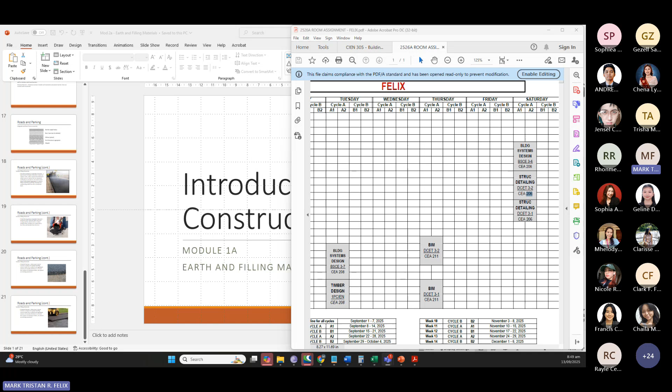Okay, let's start. I will begin with a brief intro, let me show the syllabus first.

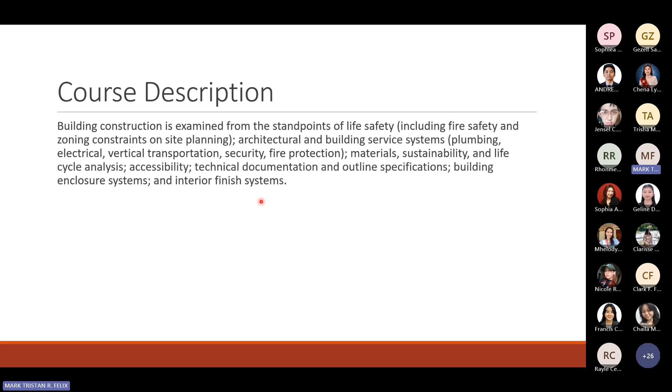That's right. It is examined from the standpoint of life safety, including fire safety and zoning constraints on site planning, architectural and building services systems such as plumbing, electrical, vertical transportation, security, and fire protection. Also materials, sustainability, and life cycle analysis, accessibility, technical documentation, and outline specification, building enclosure system, and interior finish system. This lecture will also focus on developing building systems, including architectural designs, building materials, and construction techniques, and will foster the skills required to adopt a building system approach compliant to the National Building Code and its referral codes — the other codes necessary for us to check, visit, or abide by whenever we have a project.

The students will develop an understanding of building systems, including different types and applications of building materials, diverse construction techniques, sustainability principles, and their impact on the property life cycle. This knowledge will integrate with industry-based case studies. The course will also include at least one site visit to an opening building in the locality.

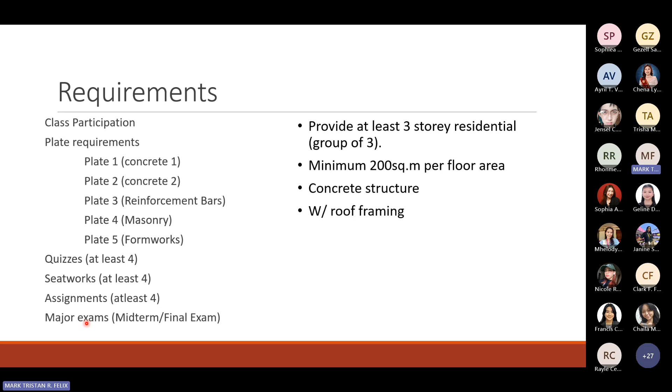Pero again, just do your part. Hindi naman kayo magkakaproblema, just provide this entire requirements. And then, of course, for the quizzes and exams, dapat passing yung mga nakukuha na grade. I will be strict with the 75% passing, so lower than that, kahit point something ang kulang, I don't round up the value ng final grade ng estudyante.

Kaya ngayon pa lang, along the way, if you will be encountering issues, kung magkakaproblema kayo, like meron kayong hindi masasubmit on time, or meron kayong issue, please let me know, lalo na kung meron akong mga deadline. And then we'll see if I will allow extensions or late submissions. Kasi medyo mahigpit din ako sa late submissions. Yun lang naman in terms of my initial request para everybody happy pagdating ng end of the semester.

Okay, so for the classroom policies, regular class is expected. It may not be particular on the online class, pero yung face-to-face class pag nagpapa-exam na tayo, expected ko papasok kayo.

Now, for any late submission, I will not accept. Let me give you an example. Nagpapasa ako ng assignment sa kabilang section, last time is Tuesday, na-extend kasi hindi ko na-upload, hindi ko naloload yung system sa Teams. Ngayon, i-email ko kahapon until 11:59. Unfortunately, meron pa ring nag-email ng 12:00, pasado na. So hindi ko lang alam anong ginawa ng estudyanteng yun. I won't accept those late submissions.

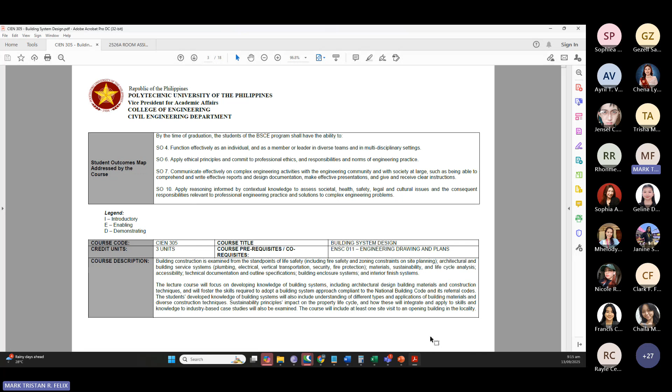So let me discuss first, as part of the introduction of the subject, the terminologies that you will be encountering along the way. If we look at the syllabus, after the building code we have concrete, steel, pre-stress, masonry, and earthworks, which isn't here yet. All of these will be discussed separately, but when we get to that week, like for masonry, we'll just go straight to estimating. So let's discuss the terminologies now so that later we can just recall them.

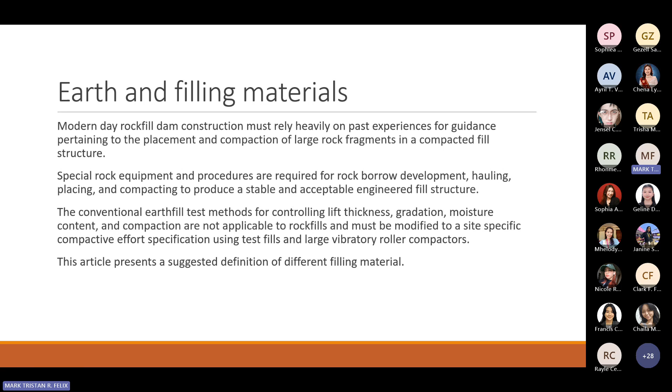Special rock equipment and procedures are required for rock borrow development. Rock borrow refers to excavation or digging, hauling, placing, and compacting to produce a stable and acceptable engineered structure.

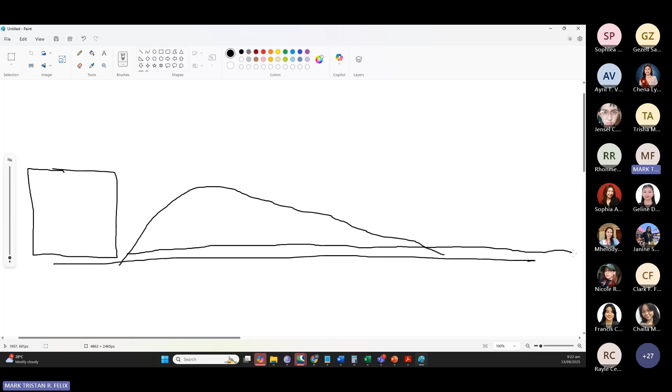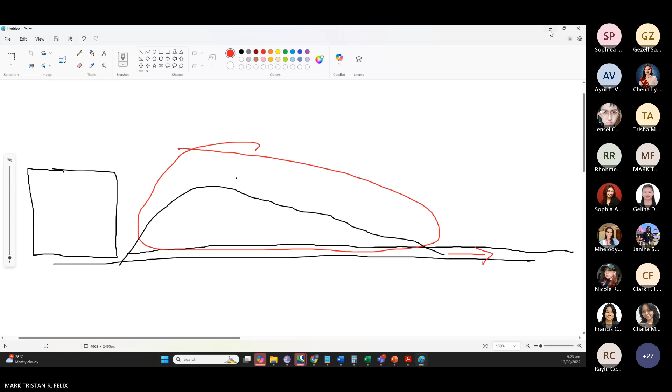Kunwari, ito yung dirt, kunwari ito yung existing. Tapos kapag dumaan ngayon yung grader, ang gagawin niya, ikakalat niya at a certain level yan, para itong portion na to will be distributed along the way. Okay, so mayroon yung certain thickness, I think 300 or 450, nakalimutan ko na. Ayan, and then after, ano ba example? Ayan ito, makikita nyo dyan.

Ayun, then after nating ikalat yung lupa, so ang next natin is ipipison. Okay, so may dalawang klaseng pison.

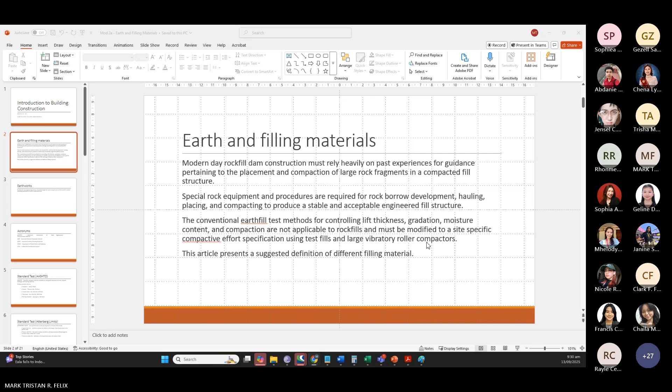For the earthworks, again, it is an engineering work created through the processing of parts of Earth's surface involving quantities of soil or unformed rock. So nasabi na natin yan na yung mga lupa na minamanage natin for the earthworks, pero earthworks, yung engineering term for that, whenever we are dealing with lupa, bato, on site during the construction process. So that is earthworks. For example, naghuhukay ka for paglalagay ng foundation, that is earthworks. For example, nagkakaltas ka ng bundok para may pagdadaanan yung gagawing kalsada, that is earthworks. Ganun din kung magtatambak, that is earthworks. Hindi lang puro excavate, pati filling andun din.

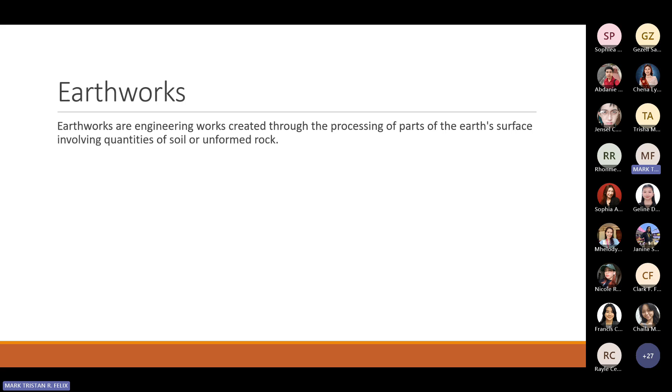For the acronym, ito yung mga ma-encounter niyo along the way. We have the AASHTO, the American Association of State Highway and Transportation Officials. This is the governing body sa US that deals with the transport sector nila na may kinalaman sa lahat ng may kinalaman sa kalsada, o highways, yung mga details for the thickness of the pavement, whereabouts ng mga base and sub-base. So AASHTO, yan yung parang counterpart ata natin ng DPWH.

We have the ANSI, the American National Standard Institute. They have that standard institute, governing body again for the standardization ng check natin. Hindi ko kasi ginagamit yung ANSI, ang ginagamit ko yung ASTM.

For the products and services, ayan, products pala siya, yan yung ANSI. Minsan ko lang kasi itong na-encounter doon sa isang software, yung ANSI. Pero yun, ang madalas natin gamitin is yung ASTM. Kasi itong ASTM ay parang standard din, manual, na may kinalaman sa mga materials. Ito yung mga raw materials like yung bakal, simento, gravel, so lahat ng mga details niyan nasa ASTM manual. Hindi lang limited ito sa construction materials, malaki ang scope ng ASTM, pati yung mga mechanical parts, yung mga chemical, physico-chemical, physical and chemical. They also have those information kasi nga testing materials is ang purpose of this governing body.

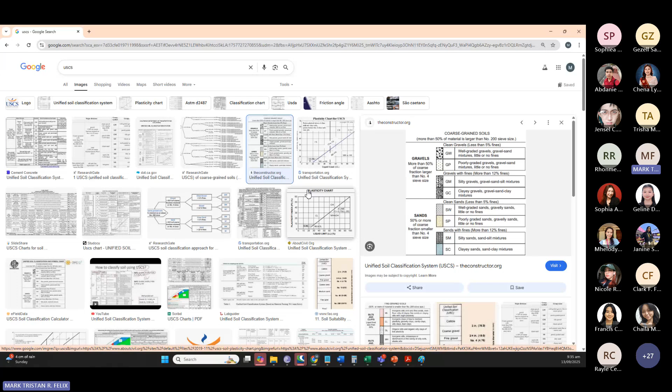Pero with this USCS, it's the classification of the soil level. Not sure kung anong governing body nag-gawa nito, baka sa transportation, ginagamit lang nila ito as system, o tama ito, sa Department of Transport din nila. Pero anyway, hindi naman limited ang usage ng USCS for the transportation projects, kasi everything na may kinalaman sa soil, for classification, like yung composition ng soil natin, if the soil is clay, silt, ganun, it's classified yan dyan, and kung paano i-classify, nandyan din sa classification system.

So under AASHTO again, AASHTO classifies inorganic soils for suitability as subgrade. Pag sinabi mong inorganic, ibig sabihin walang nabubuhay doon sa soil level na yon. Hindi ko matandaan yung term doon sa pwedeng taniman, pero dapat walang pwedeng mabuhay, kasi kung hindi, mako-compromise yung layers ng pavement natin. Just imagine kung mataba yung lupa, pwedeng may mga mabuhay na mga damo. I think mayroon tayong mga ganong kalsada, hindi tinitreat na maayos, may damo, o may punong maliit na tumutubo sa mga kalsada. Dapat hindi, kasi pag lumaki ng lumaki yun, maging puno, pwedeng masira yung ating structure.

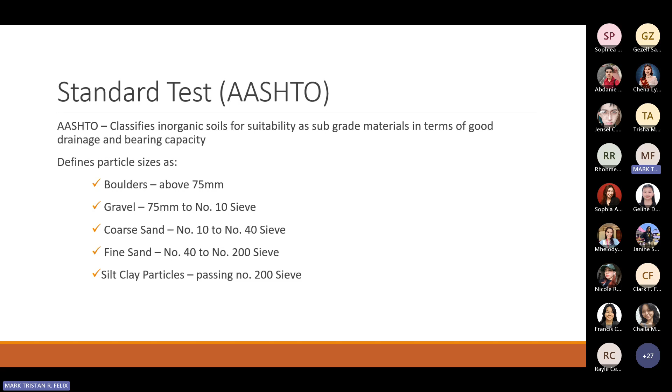Ang itsura ng sieve, ayan. So para siyang strainer, may salaan. Ayan siya, ganito. As we go down, habang tumataas yung number of sieve, eto, tingnan nyo to, malaki pa yung opening. Tapos as you go along, paliit ng paliit ng paliit, nagiging pino. So paano ba yan ginagawa?

Kunwari, I forgot kung ilang grams man ng lupa, pero kunwari meron kang lupa, mga 500 grams, isasalin mo dito. Lahat ng maiwan, i-classify mo siya base dito sa to. Kunwari, nagsalin ka, syempre hindi ka naman kukuha ng lupa ng malalaki, yung walang boulder, kasi sobrang laki na yan kung mayroong boulder. Sabihin natin, nagsalin ka, lahat na maiwan dito ang tawag gravel.

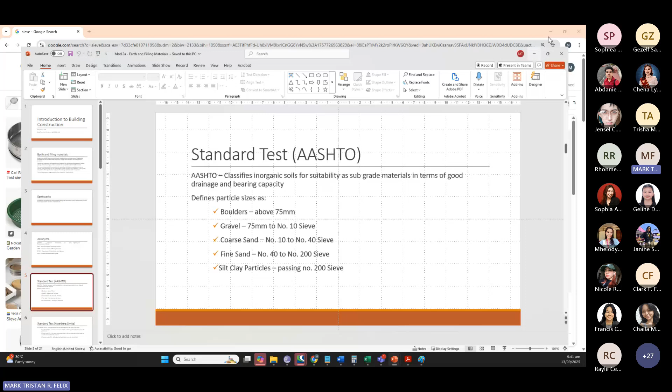So, lulusot sa ilalim na mas pino yung opening compared dito sa first layer. Lahat na maiwan doon - boulder, tapos lahat na maiwan sa ilalim, gravel. Lahat na maiwan sa susunod, coarse sand. Tapos maiwan sa susunod, fine sand. And then yung may iwan sa huli, that is the silt. Ayan, silt. So habang bumababa, para kang nagsasala.

Pero the more na bumababa yung lupa, the more na nagiging pino. Tapos habang bumababa yung lupa, may mga naiiwan kada pan. So yun na yung magiging type of soil na may iwan doon. So kung saan sila naiwan na layer, yun yung tawag doon sa portion na yun. And then based doon sa totality ng kunwari 500 grams, kung ilang grams yung naiwan, so you record that.

Ayan, so ilalagay nyo yung lupa sa ibabaw kahit hindi nyo na masyadong isala. Tapos, ipapatong nyo, papapatong-patongin nyo yung pan. Ilalagay nyo dito, tapos aalugin nyo yan. I forgot how many minutes. Tatakbo yan, so pagtapos na, okay na yon. So pwede mo nang timbangin ilan yung mga naiwan kada pan dito.

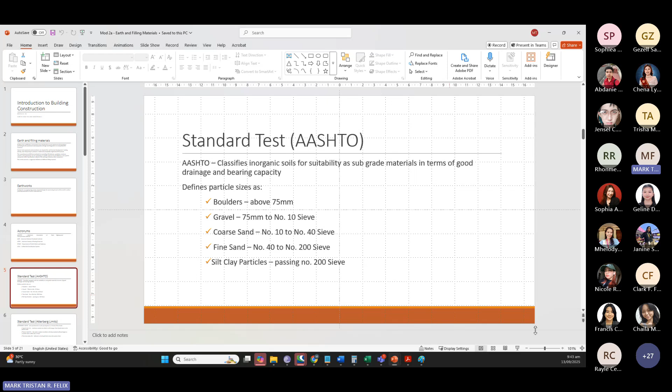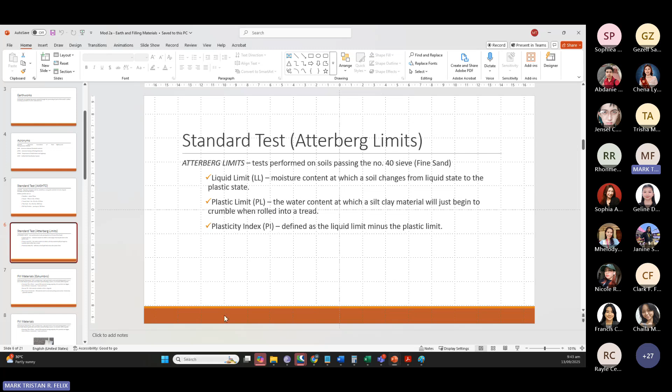Then next, also another test na ginagawa natin sa soil is the Atterberg limits. It performed on soils passing the 40 sieve, pagka yung mga fine sand lang yung ginagamitan nito. So we identify the liquid limit, plastic limit, and plasticity index. Class, i-discuss to in detail sa soil mechanics kung meron na kayo or kung wala pa. Kasi ano to, this is a property ng soil. Eto, so pakita na rin natin kung wala pa kayong soil mechanics.

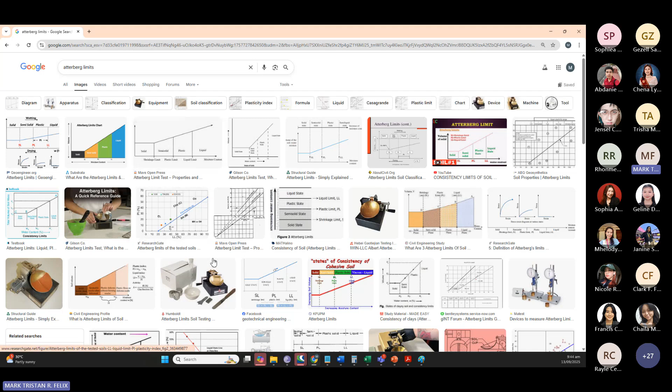Atterberg limits. Ayan, so for the Atterberg limits, they use this Casagrande cup and then ano to, yung binibilot, sana ba yun?

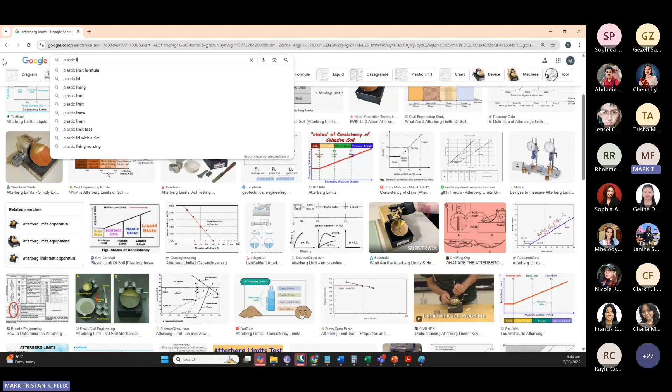Sana yun? Ayan, ito. Ayan, gumagawa nito. So, ginagawa yan sa site. Kung nagawa nyo na to, you are very familiar with this one. Kung hindi pa at gagawin nyo pa lang, kung naka-enroll kayo ngayon, gagawa kayo ng ganyan.

And then, meron liquid limit procedure naman to. And then, you compute to get the plasticity index. Next, ano pa ba?

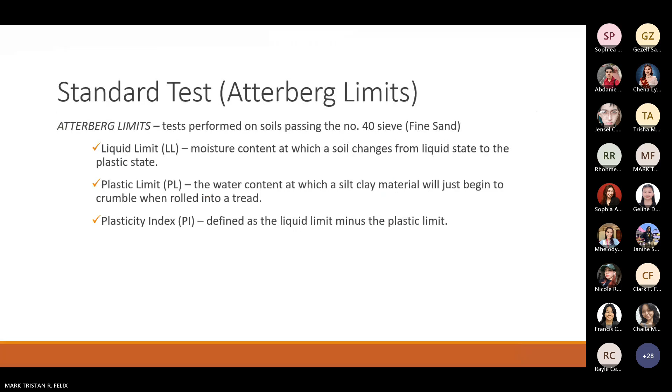For the fill material, so soil, crushed stone, and sand used to raise the existing grade or as a man-made deposit generally used under spread footings, paver, and or concrete slabs on grade. So ito naman yung mga material na pinatatambak natin, yung medyo malalaki. Normally malalaki talaga yung ginagamit natin sa mga ganyan kasi it would be masyadong malambot o masyadong pino kapag ang gagamitin mong pantambak hindi mga malalaking material. Like granular fill or filters, type of fill material having majority of its particle size bigger than 0.074 mm. Commonly sand and gravel. So ito yung mga commonly ginagamit natin.

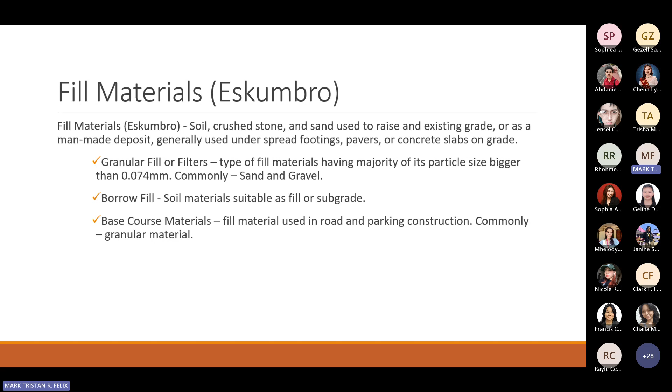Then we have the borrow fill material, suitable as fill or subgrade. Ito naman base course material, fill material used in road and parking construction, commonly granular materials. Yung iba ginagamit na pantambak, yung kunwari nag-demolish ka, sasabihin libreng panambak. Minsan pwede din gamitin yon, pero siguro sa mga slab on grade pwede yon. Pero kung kalsada hindi pwede, kailangan talaga suitable yung requirement kasi baka mag-settle. Pag sa slab on grade kasi kunwari bahay lang, hindi naman ganoon kalaki yung weight na dumadaan compare sa mga kalsada.

So eto example, granular filler, and then meron tayong borrow fill, pagka medyo pino.

On the other hand, eto pala yung layers of the pavement. Kung eto yung surface mo, so you have a base, sub-base, tapos subgrade. So at least meron kang 4 layers. Yung iba, subgrade, base course, surface, wala nang sub-base. Pero normally, at least meron 4. Meron pa nga more than that. That computation ay dinedala ng pavement engineer or ng geotechnical engineer, yung layers of this pavement.

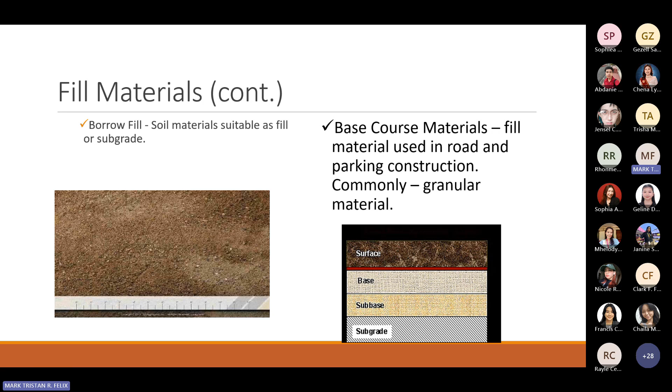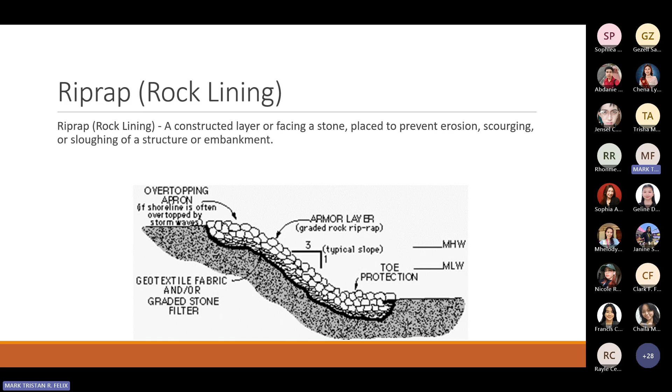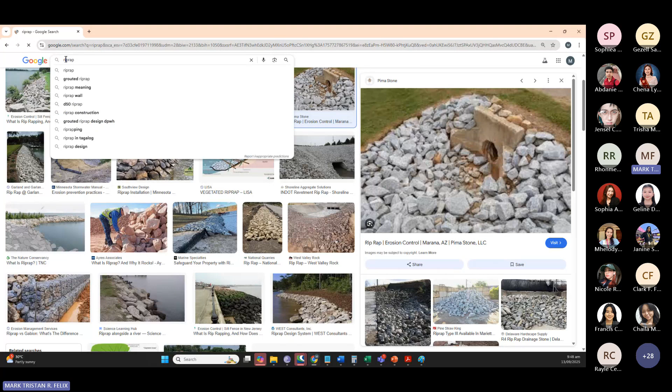Another material na may kinalaman sa earth na ginagamit natin sa construction is riprap or rock lining. It is a constructed layer or facing, a stone placement to prevent erosion and scouring, sloughing of a structure or embankment. An example of that is riprap. Normally itong riprap na to, hindi lang ito bato. Or minsan, we do grouted para syempre hindi siya mawawash out, kasi kapag bato-bato lang, later on pwedeng ma-wash out yan.

So, riprap for slope protection. Tingnan natin, example. So meron tong grout - yung grout ay cement and sand, para siyang mortar. Ilalagay natin yan, ginagrout natin para magdikit.

Usually we normally use this type of slope protection kapag abundant yung riprap sa site. Kapag hindi, syempre hindi natin pwedeng gamitin yan kaysa mag-haul tayo ng maraming bato. So we normally use another method na lang. Pero normally naman abundant naman sa site yan.

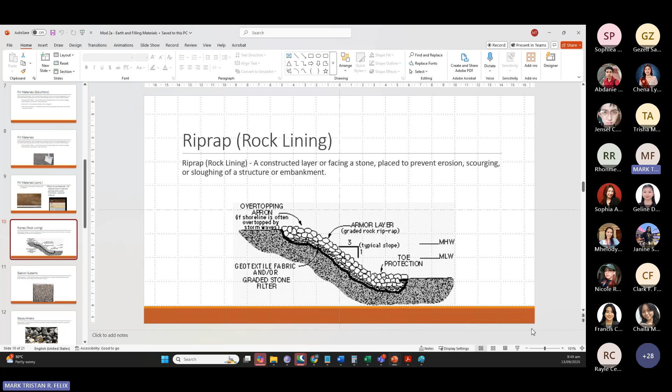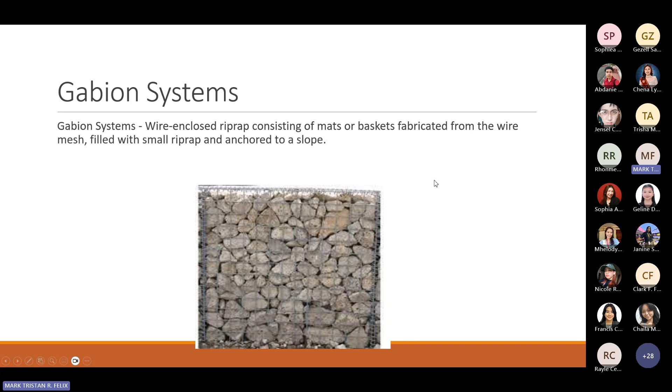Another one is gabion system. Ito same din pero inilalagay natin yung mga bato sa loob ng wire mesh type na parang pa-cube. So we put that inside and then we use that as slope protection. Para siyang gumagawa ng mga box ng mga bato. Pinagpapatong-patong mo para later on yun yung magwi-withstand ng slope para hindi mag-erode or magla-landslide. I think ang size nito ay 1 by 1. Minsan ilang beses na namin ito nagamit sa site before.

Ganito yung kapag may mga nakita kayong vertical na gabion, hindi yun square, hindi yun box na patong-patong lang. Malapad sa ilalim, paliit na paliit, tapos tatambakan ng lupa. Para siyang ganito yung gabion - isa nasa taas, tapos palapad ng palapad, tapos yung earth papatong. Kasi kung imagine isang diretso lang yan, nakasalalay lang siya dun sa bigat ng gabion, baka itulak lang yan. At least kung nakapa-steps, may somewhat resistance pa yung gabion.

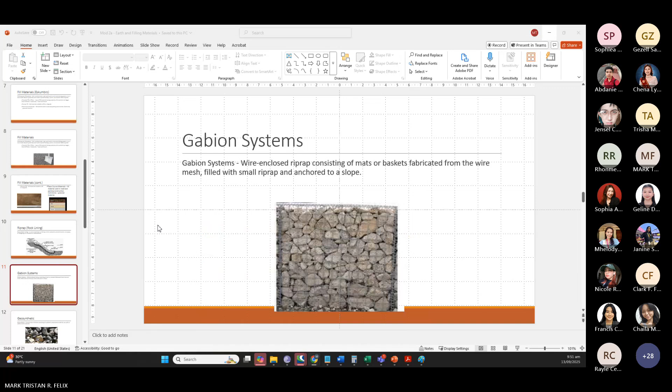And also we have geosynthetic. Nilalagay sa ilalim ng mga bato. Hanap nga tayo ng example ng application of geosynthetic.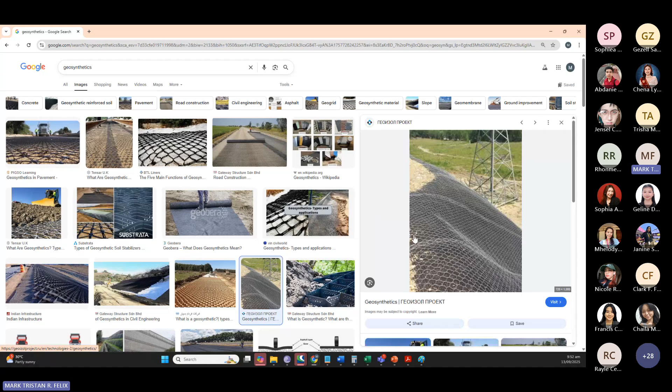Ayan. Siya, para siyang blanket. Inilalatag siya, tapos pwede mo tambakan later on. Para yung friction of the soil doon sa blanket na ginamit pang geosynthetic. So hindi siya... it will aid the soil not to be disturbed.

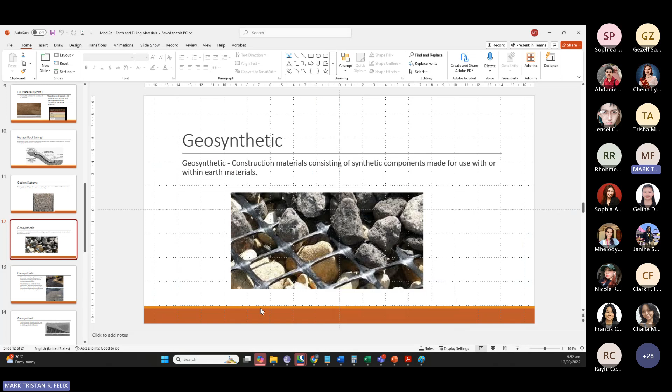And then next is we have geotextile and geomembranes. So pagka geotextile ito, tignan natin. Saan na ba yung geotextile? Sa geotextile, ayan, sa road ginagamit. Alam ko to porous. So ibig sabihin na pwede makapenetrate yung tubig.

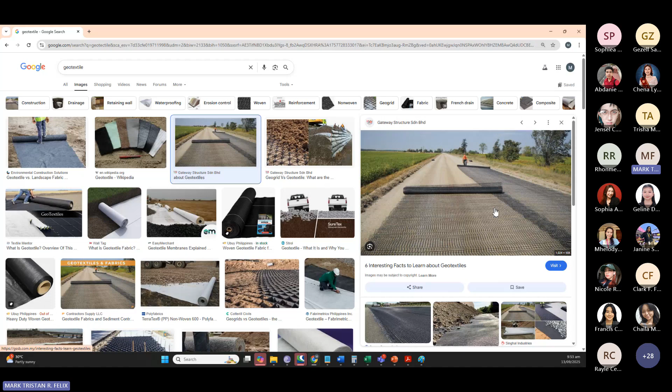Geomembrane. Ayan. Yung liner mo, parang blanket na talaga. So ginagamit to sa normally sa mga siltation pond or sa mga landfill. Ayan, landfill.

Yan na natin versus geotextile. Para lang makita natin. Meron ba dito difference? Eto, non-woven. Ayan. Pag geosynthetic, ay hindi geotextile dapat. Anyway, so yun yung difference nung dalawa. Yung isa, woven. Yung isa, parang blanket talaga.

So yun, ang purpose kasi nito is that hindi dapat makalusot yung tubig sa ilalim ng lupa, lalo na kunwari sa mga dump, sa mga landfill. Imagine, kapag nagtambak ka doon tapos yung tubig ulan na ano yung basura, so yung mga leachate, ang tawag natin doon, ito, leachate. So we don't want this to go sa ilalim ng lupa kasi pwede yang makaapekto sa bodies of water. Kung may hydrology na kayo, so it will be discussed kasi for example, you have a groundwater na normally meron talaga yan sa lahat ng lugar, groundwater.

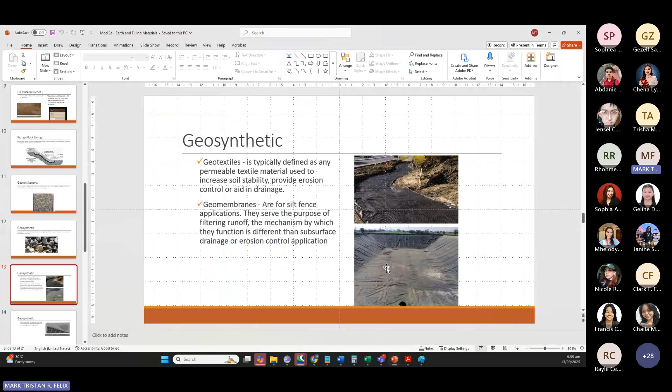So kaya gumagamit tayo ng mga katulad nito, mga geomembranes. Okay? Ano pa ba? Yeah, meron pa tayo geocomposites, usually sheet or edge drains consisting of a prefabricated core to which a geotextile is bonded. So binaband natin siya sa yung geotextile, may nakaband pa tayong sheet o fabricated. Ito, parang puti.

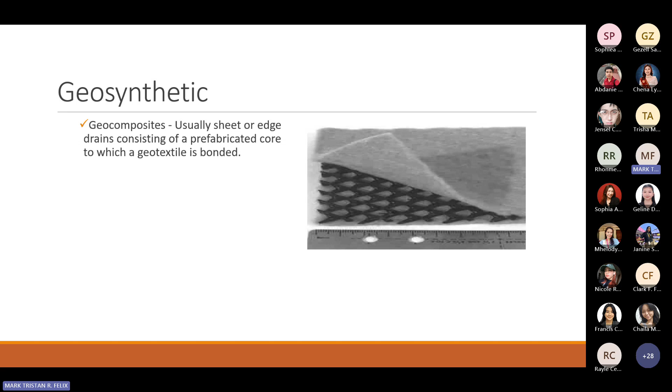Another one sa ginagawa natin sa lupa is we do termite proofing. So we know naman na merong mga insects or pests. I think hindi magandang gamitin yung term na pest, pero well, for me lang. Kasi nagiging pest siya kasi nagtatayo tayo ng structure, pero long before, nandun na yung mga insects na yun doon sa lupa na yun.

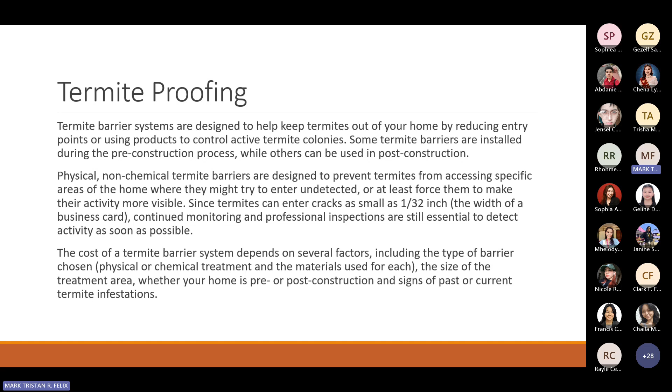Now, for us to keep them away doon sa ating structure, kasi once they are bothered doon sa kinalalagay nila sa ilalim ng lupa, they might go doon sa structure na pinatatayo natin o ginagawa, particularly yung mga termite. Naghahanap sila ng way para makapunta sa mga pwede pa nilang masirang mga wood material.

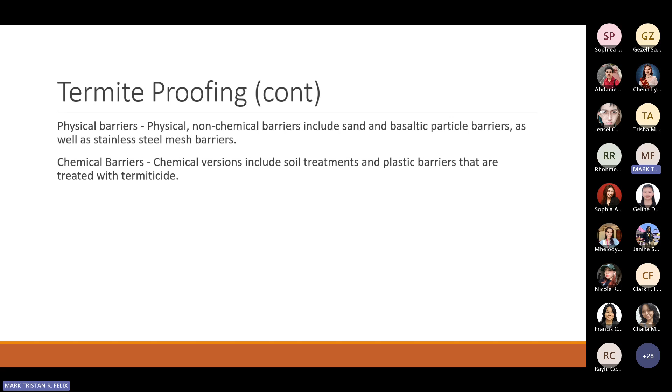So for us to create a termite proof construction, we normally have at least two methods. Isa is physical barrier, the other one is chemical. Yung chemical, yan yung may mga soil treatment, yung may inilulubog na mga pesticide, termiticide doon sa ilalim ng lupa. Or we can do also non-chemical barriers which include sand and basaltic particles barrier or stainless steel mesh barrier. So whichever will work, pwede rin naman yan. Pero ang pinaka-common yung chemical barriers.

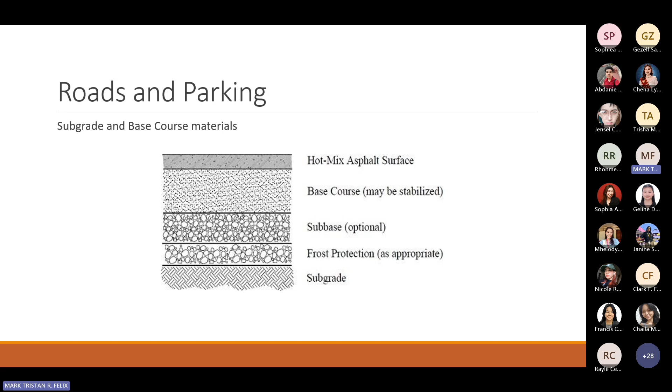May concrete na, maga-asphalt pa. Wala namang problema doon. Ayan, so yung asphalt, alam niyo naman na yan, yung asphalt ang nilalagay.

It is a dark brown to black cementitious material, solid or semi-solid, composed of bitumen, which occur in nature but are obtained artificially in petroleum, and which when mixed with graded aggregates, so yun ang hinahalo natin sa aggregate, is used as a filling material by placing, shaping, and compacting while hot over a prepared base.

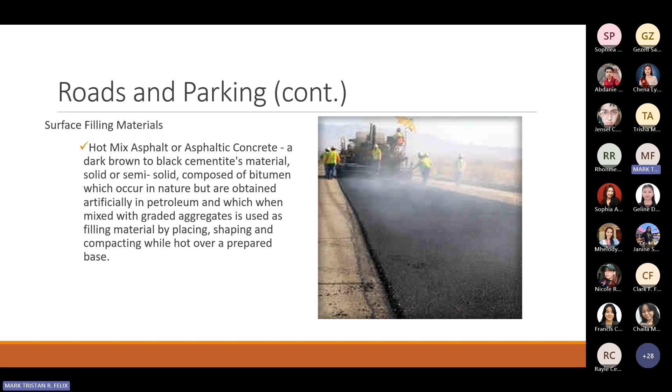Minsan para hindi siya lumamig, di ba? Kung nakakita na kayo niyan, yung inaapuyan pa. Tulad nito yan, yung cold mix asphalt.

It's prepared at a relatively light and slow curing asphalt, placed over a surface without heat, hardens to a state that is less firm and durable than hot mix. Pero pa rin niya kino-compact.

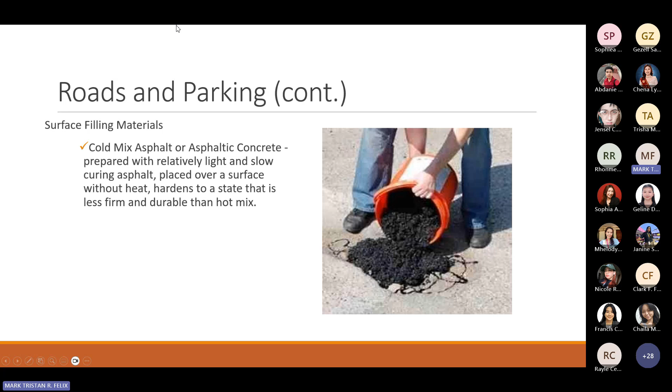And then asphalt overlay. Ito naman, when one or more courses of layer of asphalt leveling, course made of an asphalt and aggregate mixture of variable thickness to correct the contour of existing surface, are placed on existing pavement. So asphalt overlay tawag dun sa mga nagdadagdag ng additional layers of asphalt.

'Di ba meron tayong mga kalsada na bako-bako pero asphalto. So yan, they normally do asphalt overlay. Or minsan may mga potholes, so they do asphalt overlay.

I think may nakita ako sa Facebook one time. Nakalimutan ko kung saan province 'yun. Baka nakita niyo lang, 'di ba normally ginagawa sa construction ng kalsada, binabasag ng mga sira-ulo na sunod-sunod. Kaya ko nasabing sira-ulo kasi babasagin nila pero iiwan nila, tapos hindi nila babalikan. Babalikan nila pag magsisimula na yung construction.

Ganun kasi ginagawa ng mga contractor para makatipid sa rent ng equipment. So they normally break the road and then iiwan nila, tsaka lang nila ulit gagawin as they progress.

Kaya lang kasi it is a nuisance doon sa mga tao. Lalo na okay lang naman siyang basagin kung kinabukasan sisimula na yung construction. Ang problema yung, let's say, 1 kilometer ng road babasagin mo sunod-sunod, tapos ang trabaho mo naman by phasing, 'di ba? So naabala mo lang yung mga gumagamit.

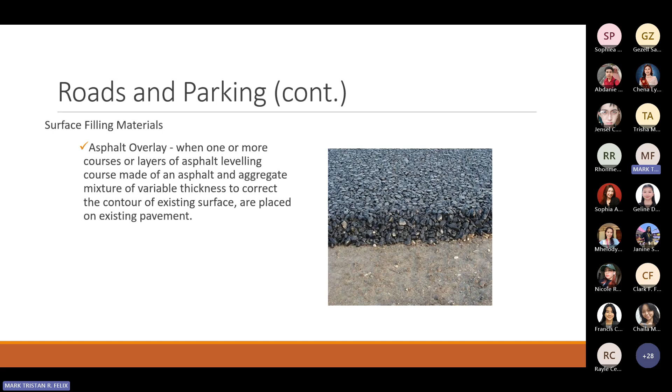So I don't know what's the reason bakit ganoon, pero dapat kasi yun nga, it should be done accordingly by phasing. Ayan, ito pa asphalt overlay. I think yun lang, that's the end of our topic. Any question, class?

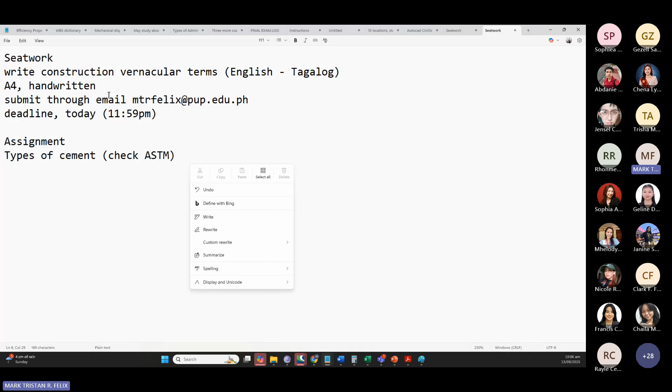Okay, hindi ko na siya paabutin kinabukasan, kasi pagkagising nyo kinabukasan, mag-online class na tayo eh, so wala rin naman kayong time tapusin. Tsaka maiksi lang naman yung assignment. Okay, yun.

Screenshot natin, for now. Okay, post ko sa Facebook, sa group chat. Ayan, yan, kaka-upload ko na, kaka-paste ko lang. May any question pa ba?

Wala na. Class, tanong ko pala yung ating klase representative, kasi yung kabilang section nag-request sa akin ng class list. Kailangan nyo rin ba nung class list na naka-enroll sa subject natin?

Asan na yun? Yung class rep muna natin. Hello po, sir, if yes, makakapag-provide po kayo, okay lang po, para rin po ma-confirm namin kung sino yung enrollees. Okay, sige, I will be sending that to you.

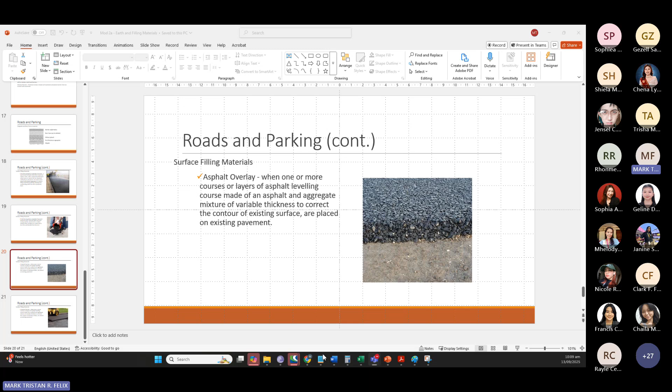Wala namang, pero maganda mag-search kayo, para lang siguro damihan nyo yung, like ito. Pakita ko na lang paano. Wala akong in-expect na dami, pero in-expect ko halos lahat nandyan. Kasi maaaring yung makita nyo, baka mamaya, kunwari mas marami dun sa isa, or mayroong mga words na wala dun sa iba. Tingnan natin.

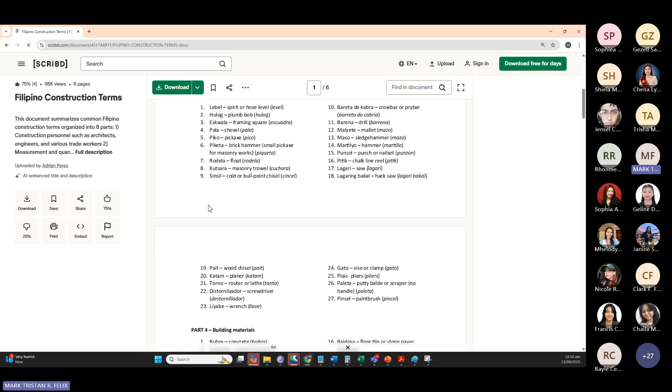Yan, kunwari yan, search kayo dito. Ayan, mukhang konti to, so hanap pa kayo ng other sources. Marami naman available yan sa iyo, ito, tingnan natin. So ito, pwede nyo itong tingnan. Ayan, so pag tingin nyo kulang to, lipat kayo sa ibang source. Ganun, para lang mas, para lang, again, makover nyo as much as you could.

Para later, yun na nga, sa actual, alam nyo halos lahat. Again, walang limit kung ilan yung word, walang minimum or maximum. Kasi marami talaga. Meron pa ka kanina yung, sino pa ako, na may nag-raise ng hand? Jonash? Yes?

May I ask lang po if yung A4 po is may tawag dito, may format po ba? Wala naman, okay lang, pangalanan nyo lang. Ang normal lang namang format na usually nasa sinasubmit for seatwork and assignment sa akin: pangalan, yung section nyo, course and year, yung subject natin, tapos date, yun lang. Tapos yun, kung that is assignment, ganun lang, as in very basic lang, pero yung format na may front page etc., so wala ganun. Ayun. Sino pa?

May nagtaas pa kanina, wala na. Lalaki yun, saan na ba yun? Justin, may question pa, Justin? Or nasagot na ng ibang questions? Sure, okay na po, thank you po. Okay na? Sige, so wala na?

Any more questions? Sige class, again, don't expect na mabu-view nyo yung recording dito sa Teams, kasi may problem yung IT natin ngayon, I think in terms of the file storage. So yun, I will download the recording and will upload it on a separate platform and I will be sending that to you once it is uploaded na lang.